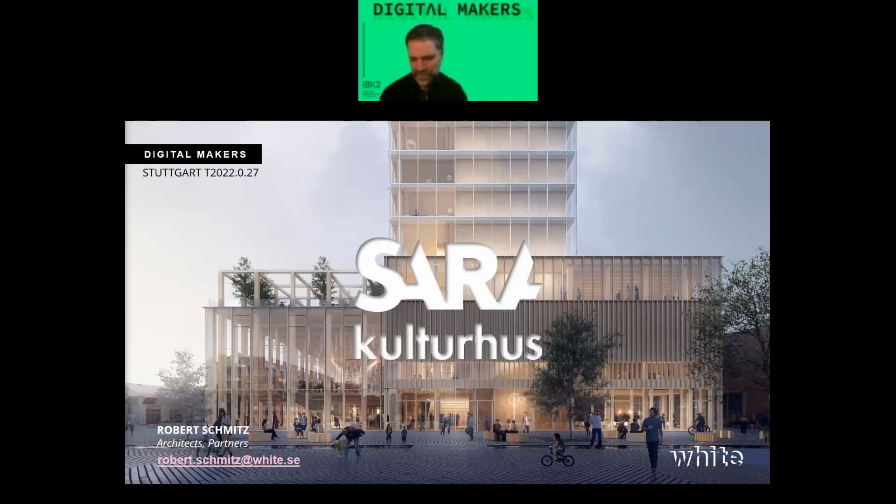We got in contact when we had this exhibition, Heart of Wood, in Berlin, about this project at the AEDES Architecture Forum as a single project exhibition. The exhibition was focusing more on how the construction is very strongly linked to the architecture, following that process.

Since then the exhibition has hit the road, and we just opened it up in Prague last week. It's going to be exhibited there for a couple of months, until the end of March or so. There is a lot of interest in how to build in timber, and as you said, it has become a beacon for sustainable building construction and for timber, becoming a backdrop when discussing timber and the possibilities you can do with it.

Germany, as many other countries, almost any other country, has problems with legislation for building in timber. We're fortunate in Sweden that our regulations are not based on material, but based on function. So as long as we can prove that we can build this and people can get out safely from the building in case of fire, we're allowed to do that. That's the main reason why this is possible.

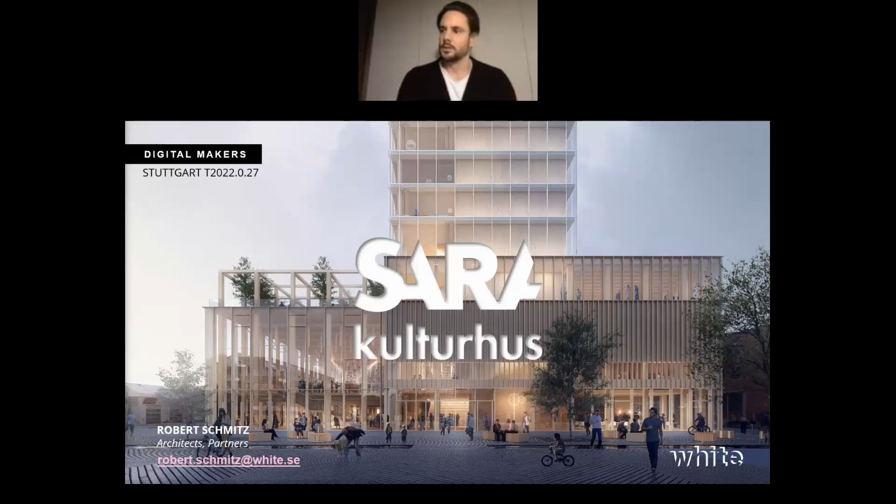This journey for them started long before we came into the picture, with stakeholder involvement and dialogue together with the municipality and the people in Skellefteå, asking them what they wanted and needed in the city to make it more attractive. After they decided they wanted this culture center right in the center of the city, they launched an open competition, and that's where we got involved in 2016.

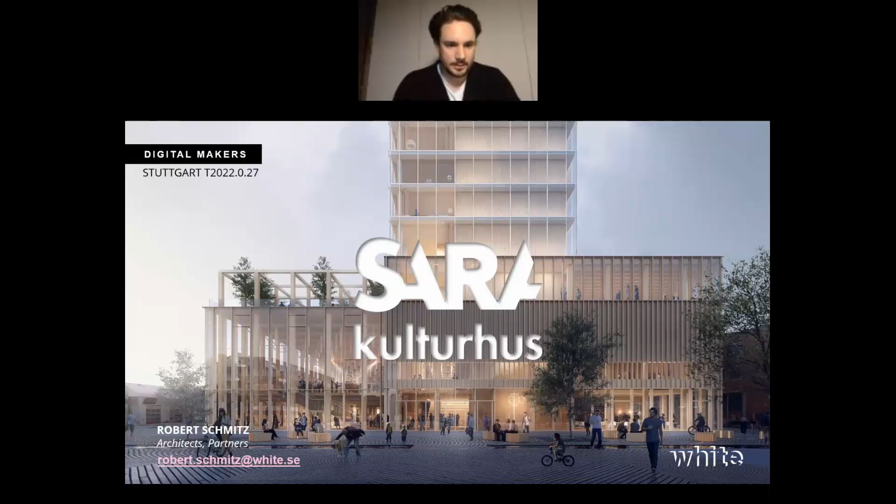But let's see if I can... oh, here I can do it like this. There. But first, a little bit about White Architects.

My name is Robert Schmitz, and I've been working for 15 years at White. Before that, I worked in smaller offices, and I also worked at the Royal Palace in Stockholm as an architect for the object, I would say. So that's my background.

Now I'm working with heaps of different projects, but I tend to work mostly with large scale, complex projects. At the moment, I'm working on a high rise of 32 stories, sadly not in timber, but it's going to be one of Stockholm's biggest public transportation nodes, with the tower straight on top of that. That's for another lecture, I guess.

But I've been working with this Sara Culture Center since the competition and all the way into the opening this fall. White is Scandinavia's leading architectural practice and one of the largest in Europe, with projects across Europe, America, and Africa.

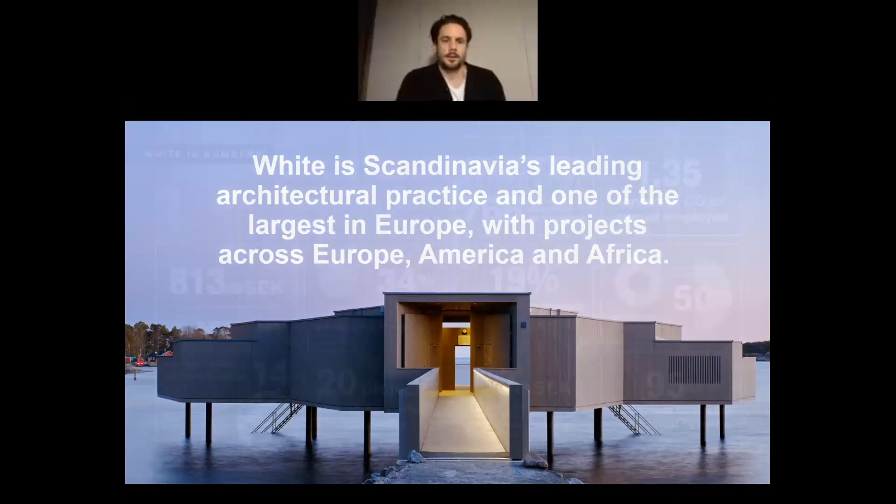We also have 14 different studios. Most of them are located in Sweden, of course, but we also have studios in Oslo and London, and from last year in Stuttgart, where we have an offspring. The offspring is from the Stockholm office, so we are also supporting and quite involved in the Stuttgart office. There we have about 7 people working at the Stuttgart office, but in Stockholm we are about 230 people working, so we have quite some muscle if we need to help the Stuttgart office, I would say.

White has always strived to work with architecture and sustainability in integrated design. We think a holistic approach is the best way of dealing with these matters. We also like to keep numbers on our environmental impact, so you can see that we're trying to keep that - not just saying stuff, but also doing the same as we say, if you understand what I mean.

We are an employee-owned company, so every employee can buy stocks and shares in the company, and the revenue goes back to the people that actually work in the office. We also have a partner system - I'm a partner, but there are lots of partners working together as a collective, basically.

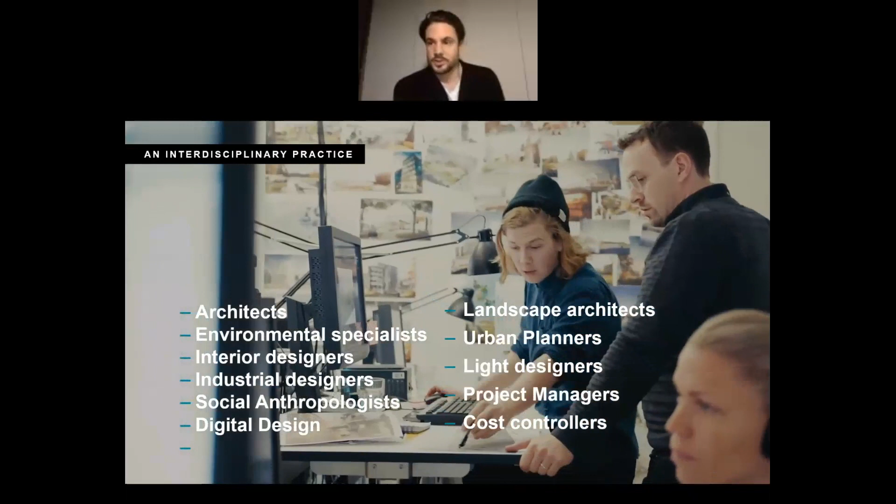We work interdisciplinary throughout the entire design process with architects, environmental specialists, interior designers, industrial designers. We have social anthropologists, and we work a lot with digital design throughout all of our projects. We also have landscape architects, urban planners, and project managers. We work a lot with cost control, really in the early stage of each project, so we can actually make them feasible for our clients.

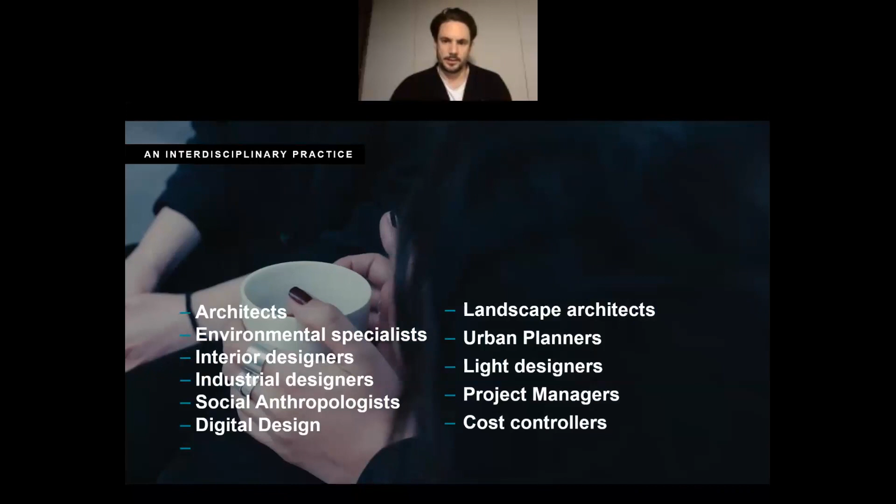Our vision is that by 2030, all our architecture will be climate neutral through our design. This is quite a bold vision to say, but since we said it, we have really started this journey to transform into a more carbon dioxide neutral construction.

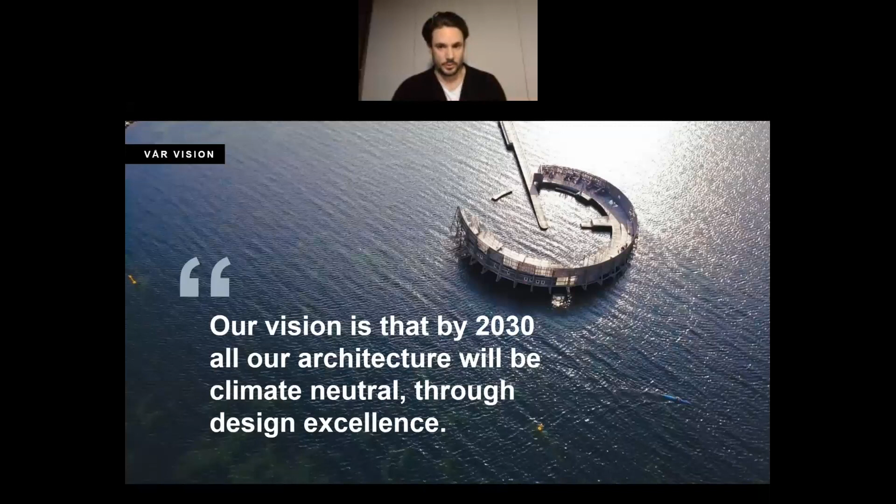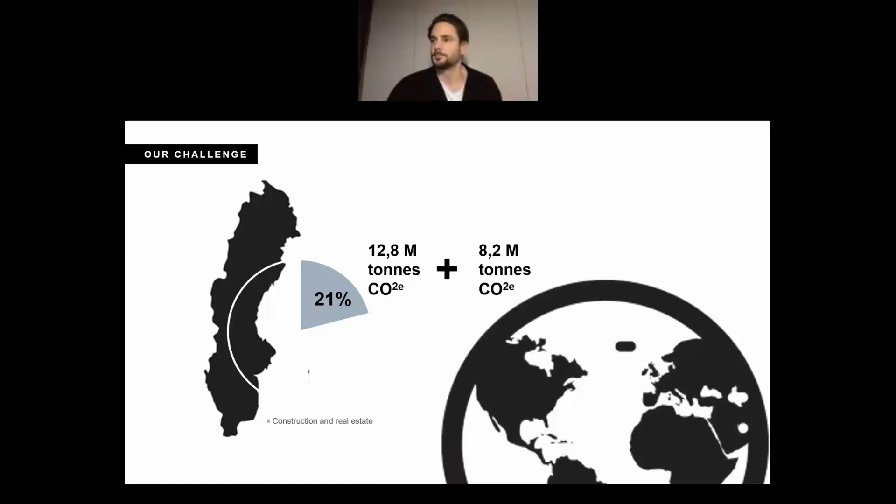That is our challenge, and I always start with this because construction and real estate takes about 21% of carbon emissions, and in Sweden we're producing about 10 times more than the planet can hold. So it's our responsibility as architects to investigate and suggest materials that have as low impact on the environment as possible. Timber is one of those - the only renewable material that we have today to work with in construction.

Being owned by ourselves means that we can do whatever we want with a profit if we have one. We have a White research lab that we can channel our profit back into research, which benefits our project. This is mostly project-based research. We have lots of different levels of researchers, but it should be hands-on, so everyone can participate. It doesn't have to be topic-based, it can also be work within a project. We have a network distributing this knowledge back to the rest of the company, so they can make it into their practice as well.

One of these research labs is timber, because this will help us in the transition into carbon neutral construction. With the Sara Culture Center, we really wanted to investigate the possibility to build a complex, large-scale building like this in timber. So we used the research lab to get funding to actually participate in this competition. That's one thing we do with this money, for example. It's basically very hands-on.

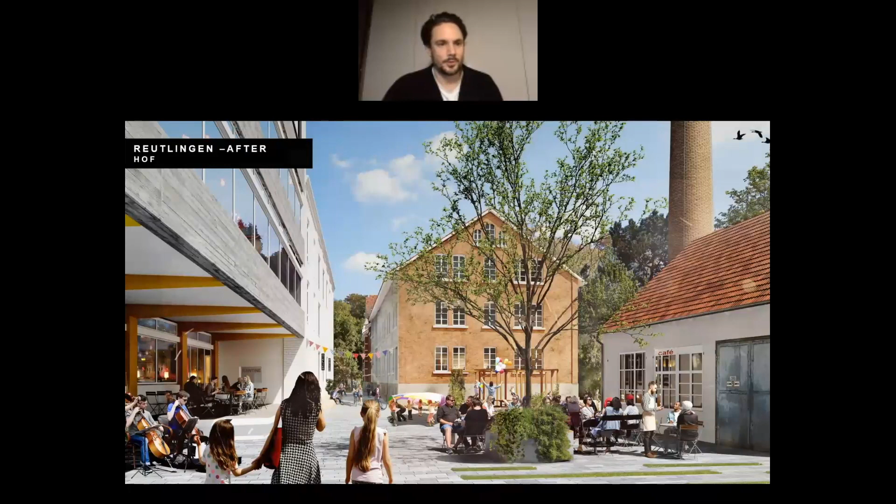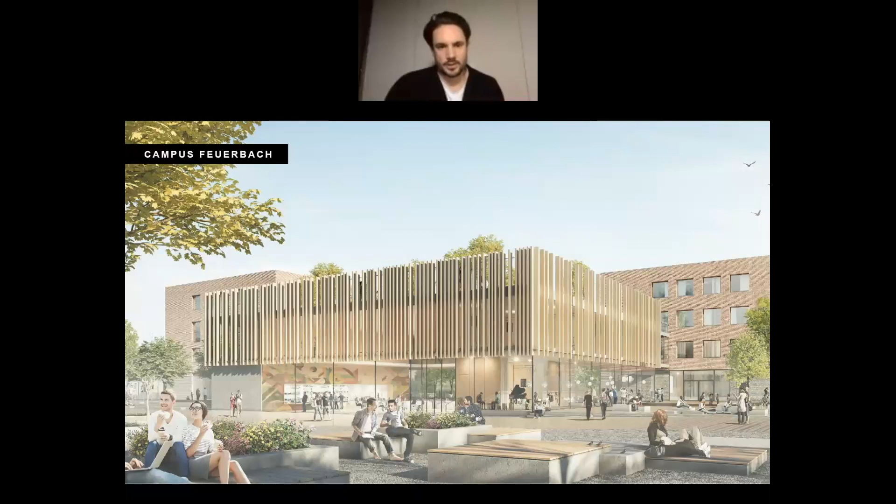Here is another one, and these are all competition wins. Mostly we have added things in timber, and we've used the Sara Culture Center as a reference in all these projects. So this is not only a beacon for sustainable construction, but also a beacon for White and for timber solutions. We learn a lot from this project, and we try to take advantage and use our skills to develop new methodology, not just in culture centers, but also in residential projects, for example for elderly.

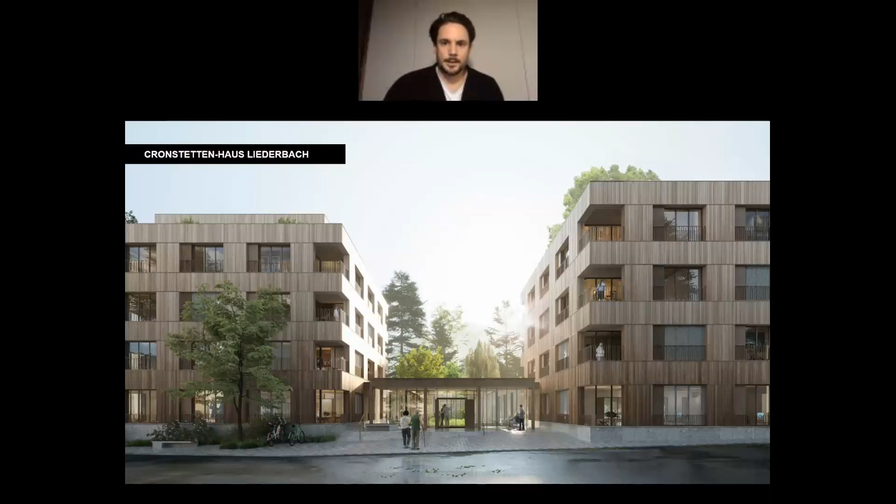At the Stockholm office, I'm head of competitions, so I decide which competitions we should go on, and I try to help with teams and everything. But I also compete a lot myself. Right now we are investigating timber in almost all of our competitions.

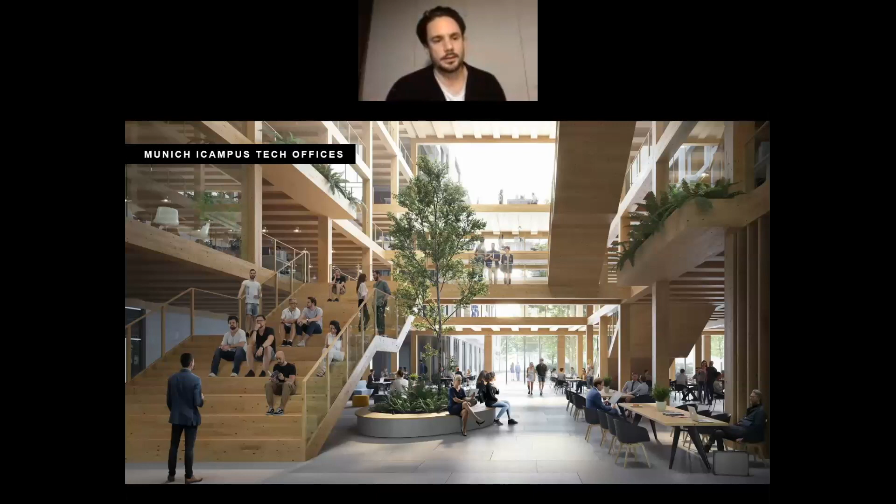This is a competition in Germany, in Munich, the iCampus, where we're working with beams that could be in CLT but with long spans, for example, to get a lot of flexibility in the building. Sorry, we didn't win this one, but we won another competition in Riga, Latvia.

It's called the Kimmel Quarter, and this is also an old beer brewery factory that is going to be converted into a culture center of some sort, combined with a new establishment of offices. It's about 50,000 square meters of timber offices in 6 stories. Here we are actually changing or testing the fire regulations in the country to see if we can build this tall with so many stories. We have the Sara Culture Center as proof that you can do it, that it's not just theory. So it opens quite a lot of new doors when working with timber and new materials.

Since the modern timber industry is fairly young, it's 25 years old or something, it's still rapidly changing and developing. So I would say that almost any major timber project is a pilot project, where we have to learn new ways of how to handle it and how to utilize the timber for its own purpose.

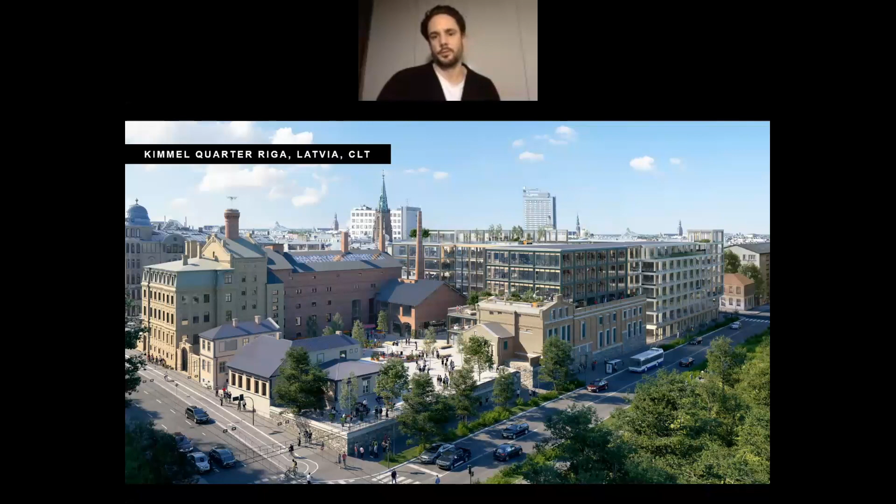Here you can see the interface between the old brewery and the new buildings from behind. We wanted to have this quite intimate scale within the block. This is being used as a culture center, a venue today, and we didn't want that to change. More of the office development could enhance the culture part and add qualities into that.

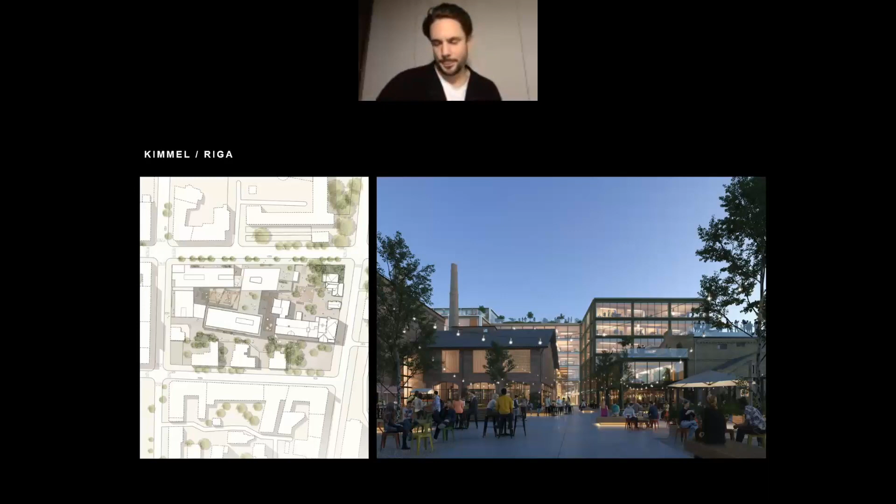Should I continue before I come to the actual topic today, or do you want to have any questions? I think it's fine if you want to continue, and if somebody has questions, we'll put them in the chat. You can ask questions, and you understand my English and everything? Better than okay, most of us.

The program is 17,000 square meters of culture center, and 13,000 square meters of hotel and conference. So it's the public and the private working together to benefit from each other and create a culture hub in the city center, basically.

The culture center consists of 4 existing culture institutions: a public library, the city library, a museum, an art gallery, which are both public, and then the theater, a regional theater, which is quite famous in Sweden. It also travels all the way around the region to smaller cities as well.

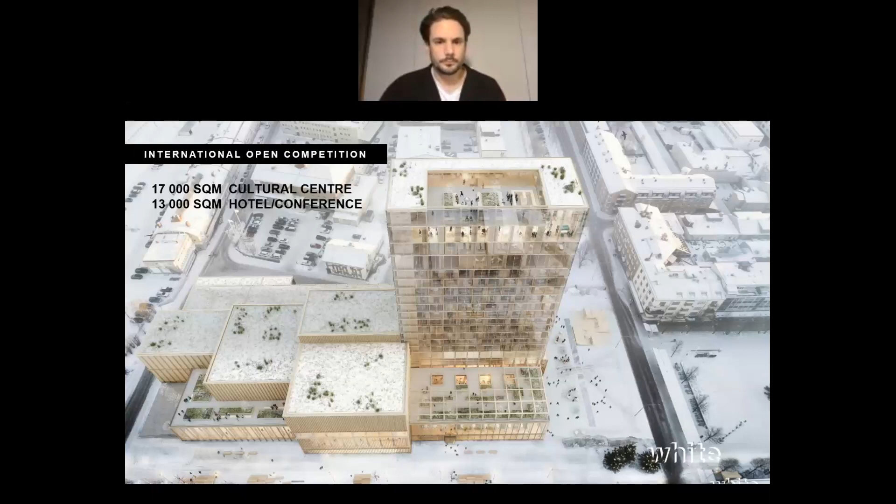But now they have their own home stage, which they didn't have before. And our concept when working with the project was that we wanted the building to take part in the city and not create any backsides.

We wanted the interface to be easy, so you could look into the different operations that were inside. So we placed all the big stages and scenes in the center, side by side, allowing all the different operations to work with the city.

They allowed for entrances in all directions, creating street life on the streets. We didn't want to have any backsides in this building. The other stages are great venues, but when you're there, you're only looking at the stage. So this should be a building that operates through the entire day, from morning until evening.

We're working with adjusting the scale and heights to its context and its surrounding street levels, with these boxes that both expose the contents and also work up to the high-rise where the hotel is. This creates different and new public spaces, also vertically.

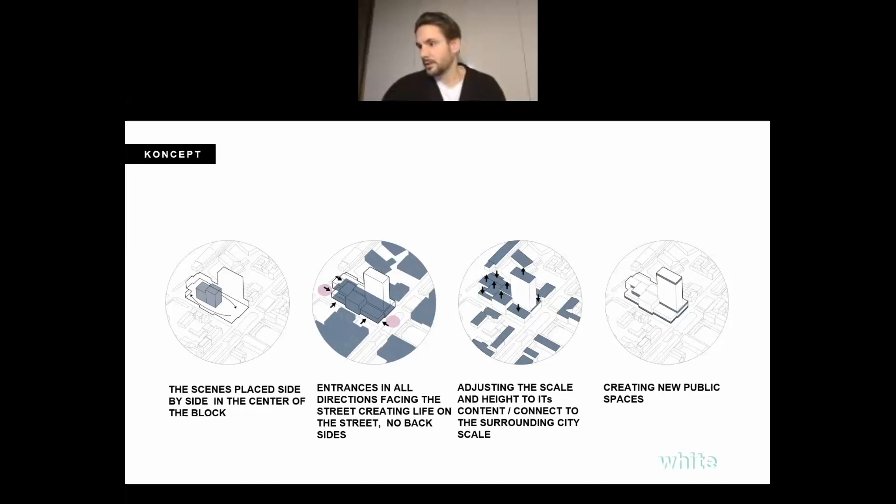So you have a new perspective overlooking Skellefteå, and it also gives back spaces to the people who live in Skellefteå. It was very important that everyone could get up there, even people who don't pay for a show or have to have a dinner.

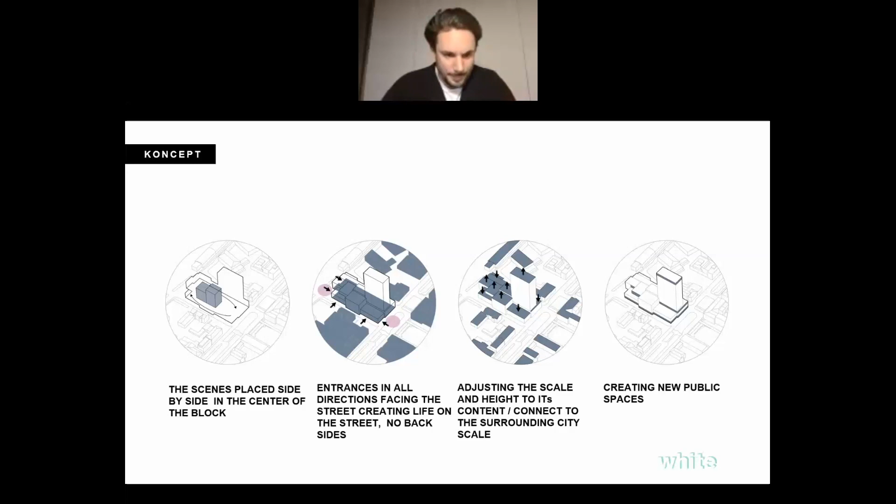So then we have created a new landmark in Skellefteå, a sustainable landmark. And with this new scale, the building is twice as tall as the second tallest structure in Skellefteå. So you could say that's quite a bold move.

But since we have exposed the timber and used it as an expression, people can really relate to it, as I mentioned before. There hasn't been any complaints at all, basically, since the timber gives this warmth and character to the building. This is something the people in Skellefteå are proud of, I would say. And it becomes, as one critic said, a friendly giant in Skellefteå.

And the landmark also, because of the glazing, which also exposed the timber within, really participates to its surrounding and gives life to the streets of Skellefteå, especially during the winter season or at night.

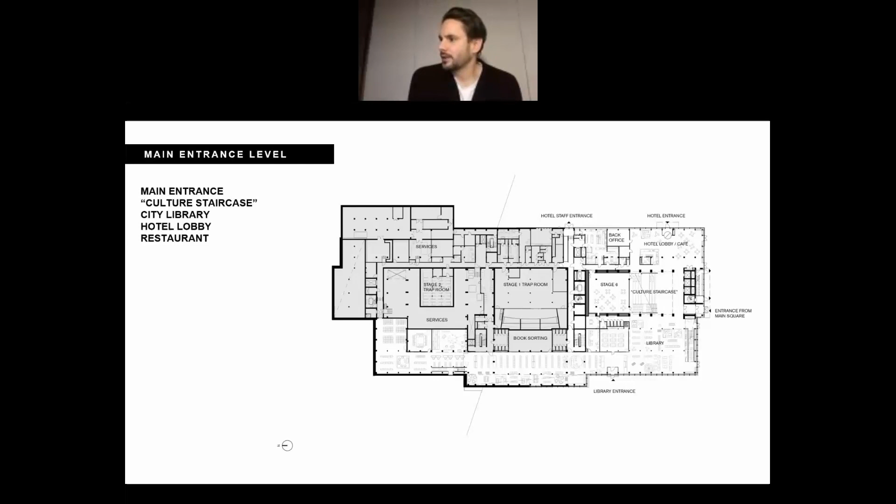Here is a plan of the building, and this is the ground floor, with the entrance facing the main square. Inside, underneath the high rise, you come into the main entrance, where we placed the culture staircase, as we call it. It's an oversized staircase connecting to all the different operations within the building, and this becomes a melting pot or meeting place for all the people.

And you can get in here without being able to pay, or without having to pay for anything. Our ambition was that this was supposed to be the new meeting place in Skellefteå.

And here we put the elevators for the hotel, so that the hotel guests should interact with normal people in Skellefteå. We also had the library as the anchor on the street level, because people will use this during the entire day, and this is also the one that is open the longest hours.

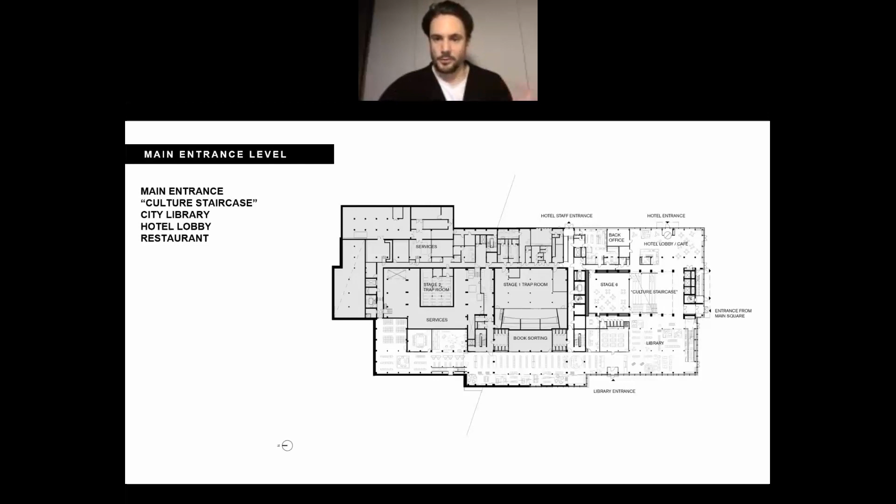So basically it's shared between the hotel lobby and the library, so that people can really mix and interact, and hopefully this becomes a platform for discussions and culture in the city. And here you can see the culture staircase, as we call it.

You can see these massive columns supporting the high rise in solid timber. They are about 600 by 800 millimeters thick. That's something that we really wanted to express in the building, using the construction timber as architecture. Also, the trusses holding the ceiling are made from timber.

But here we wanted to give the space character. We used steel for the diagonals, since steel is better at taking tension, and timber has a better way of taking compression. Otherwise, it would be so thick that there would only be beams. So this is a way to play with material optimization, while also having it as ornamentation, basically.

So from here it leads to all the different operations in the building. This is when you come up from the staircase to the main foyer that basically surrounds all the stages at the upper level.

It's a split level, basically, so we have two entrances: one the main entrance, and then the theater entrance on the other side facing the train station. This is a space that is very large because it's going to hold banquets for 1,200 people.

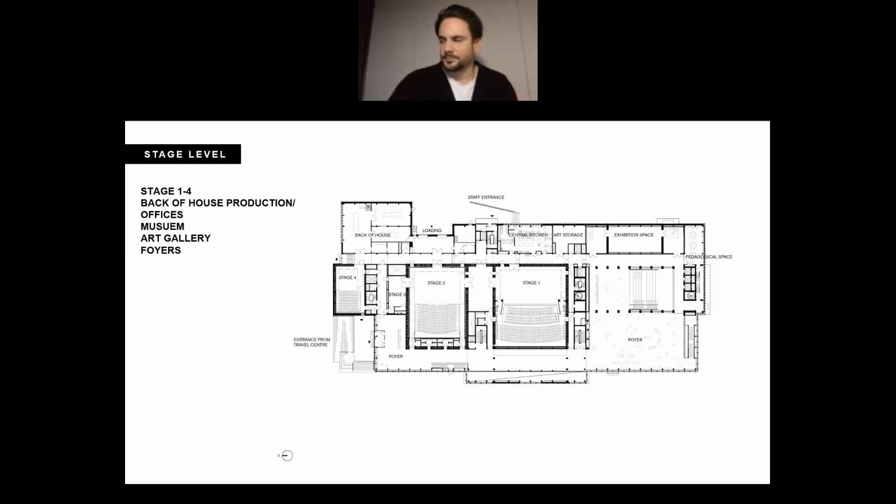Behind that we have all the back-of-house functions, with the joinery and forgeries and sewing for masks and clothing, for example, and the changing rooms for the actors. So everything is integrated into each other within the building.

So we've been working on connecting these two floors, working with the library and the foyer as the lungs of the building, so that they can be used in so many different ways, in different configurations, and hopefully the different operations in the building can work together in these spaces as well.

We've been working a lot with digital design, working with BIM in this project from the very start of the competition. This has been a very good instrument to show that the construction is very important, because it will be the architecture. It explains and visualizes to all the stakeholders in the project, because we've worked with almost 100 persons at the most, so that they also understand the effects of certain choices.

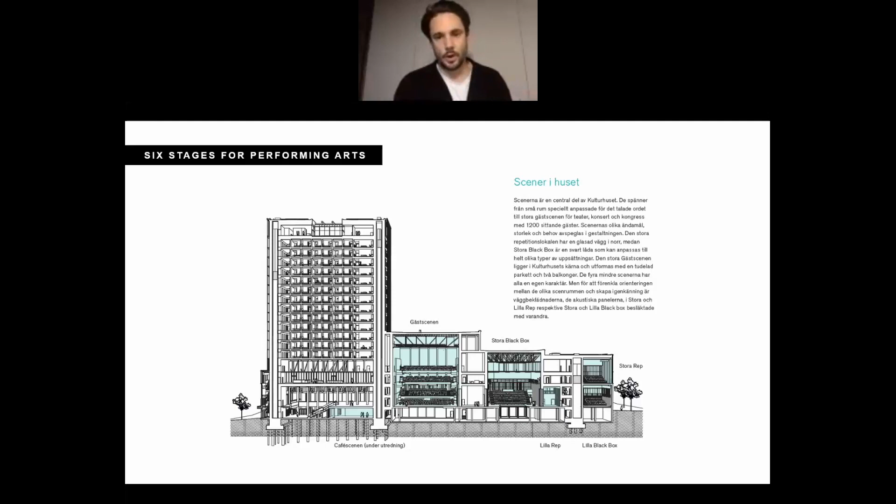The section shows the stages running alongside the entire building, and then you have the high rise with the hotel that ends up with the staircase and the main lobby. It's 6 stages for performing arts totally. The main stage holds up to 1,200 seats, but with retractable seating we can go up to 1,500. This is the building from the stage looking into the saloon.

It's been open since September, I think, and it's been having shows until quite recently when we had restrictions again because of COVID. They've been sold out almost every night, so there has been quite a need for performances and for community in Skellefteå as well.

This theater is also made with the walls and the roof, the trusses holding the roof, everything in CLT and glulam pillars, and the balconies are made from CLT slabs.

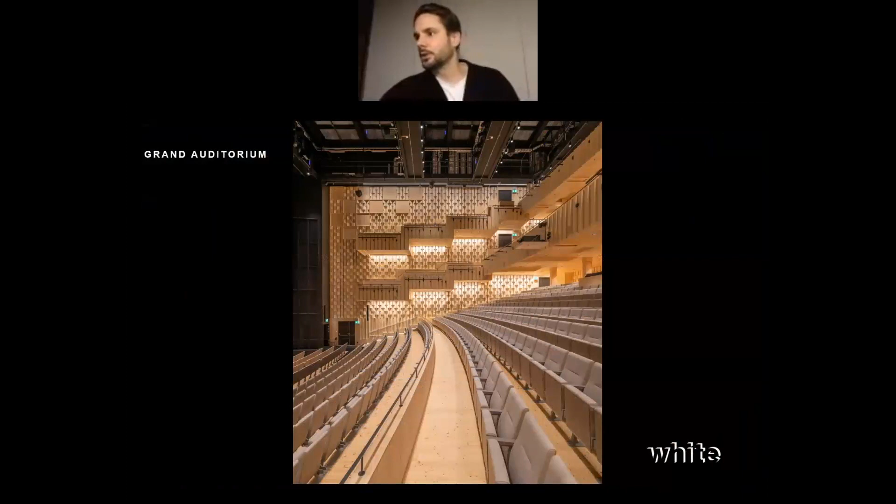We worked a lot with the acoustic panels, adjusting them so they have the right performance, and in the end they were easiest to make in solid timber as well. So from having boards with insulation or plastic insulation behind to fulfill some requirements, it became easier just to have a chunk of timber, achieving the same solution. It's about rethinking construction and rethinking the way to use stuff, how to build stuff.

Throughout the entire design process, the crew worked on simplifying this. When we work with timber, we don't need any other material. In a way it's taking back an old technology, but in a new form.

Let's go to the hotel. I'm giving you a guided tour across the building, and you just let me know if I'm getting too slow.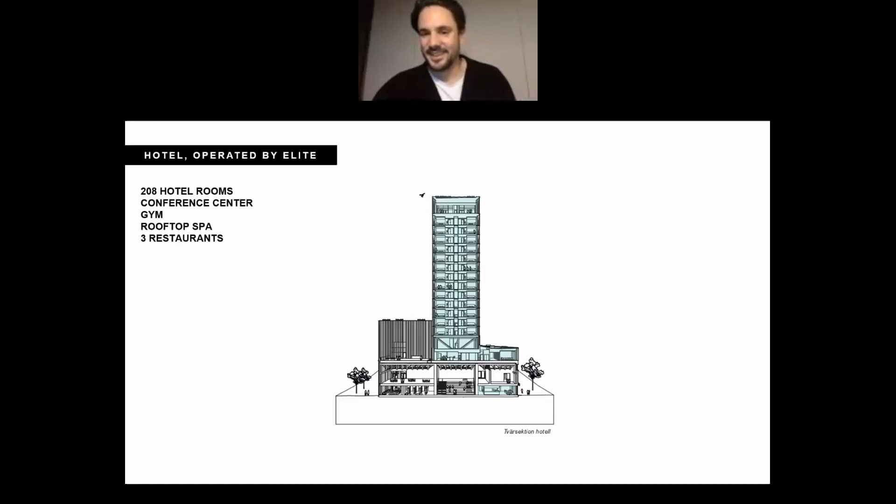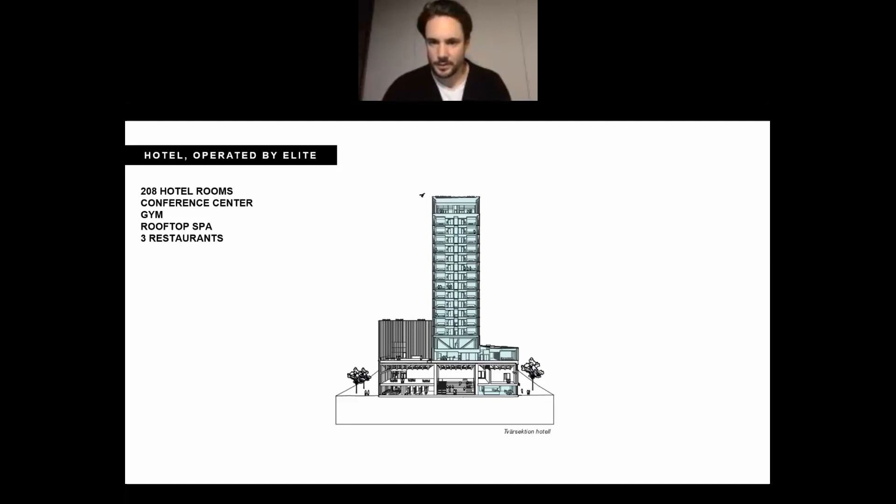The high rise, not quite a high rise but 20 stories, consists of 208 hotel rooms. It has a conference center, a gym, a rooftop spa with an outdoor infinity pool—it's a very small one, but it's still there. And it has 3 themed restaurants: one on the ground level, one on level 4 with a terrace, and one on top overlooking the Skellefteå skyline.

These hotel rooms are made as 3D volumes, pre-manufactured in a factory just outside Skellefteå, 40 kilometers away, then delivered on site and assembled and stacked on top of each other for 13 stories between 2 cores of CLT, stabilizing these. The entire building helps stabilize and take down shear forces from the high rise.

So the construction is very integrated into the design. All our design decisions were made so that we could allow the high rise to stand, basically. That was also good for us in a way, because then we couldn't change it to another material, since we'd have to rethink the entire construction. This was something we came up with in the competition as a concept for the building.

This way we also don't need any diagonals in the facade, which is very unconventional when working with timber, for example, for stabilization. That was something we really stressed—we couldn't stress enough that our goal was not to have any diagonals in timber or in steel in the facade.

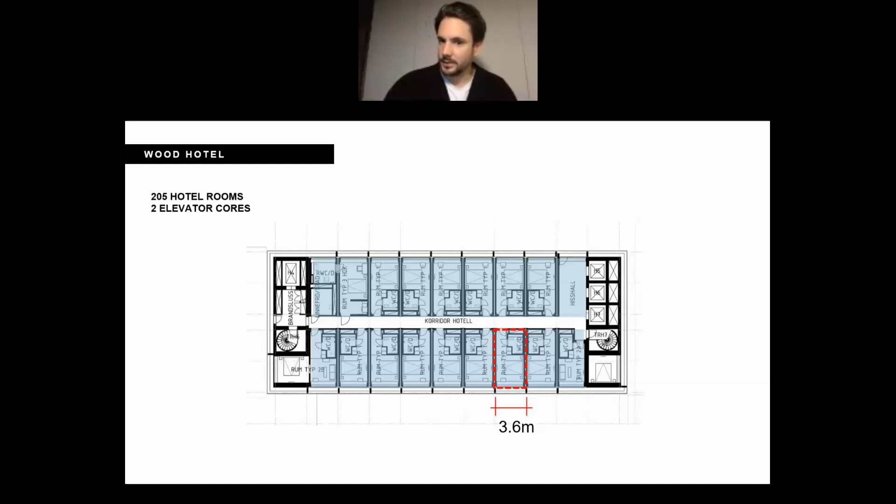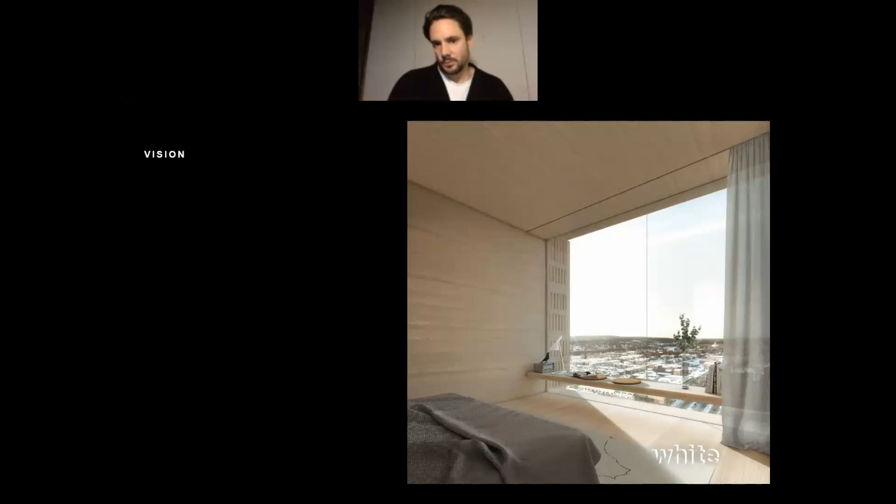Because this is self-bearing, it allows for a single sheet of glass as the fourth facade facing Skellefteå.

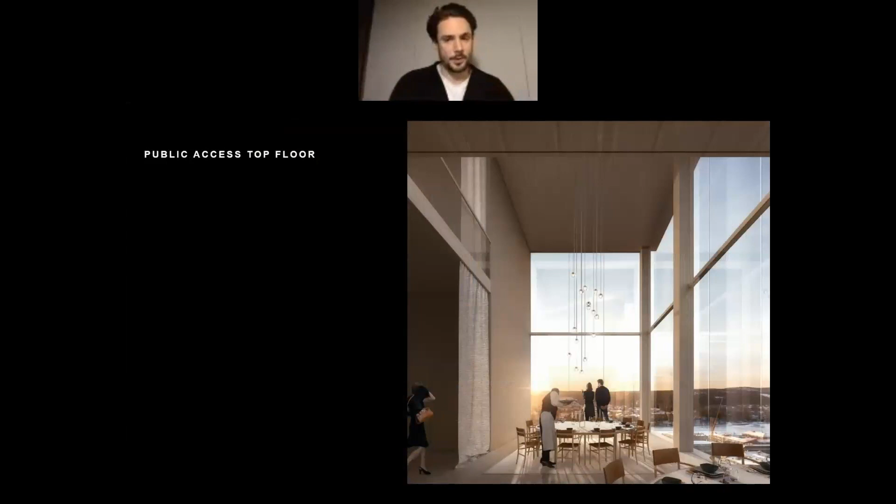On top we have a restaurant and the spa. The spa was the latest addition to the program, which also made the building grow one story, from 19 to 20 stories. But it was really a challenge to put a spa with lots of water into a timber building—it's not recommended for everyone.

This building is really tailored to fit its purpose, and it has so many different typologies of solutions. It really becomes a library of standardized timber solutions and details that can be used not only in this project but in many other projects as well, more residential or offices. This has really been a test bed for us in our search for how to manage, in a feasible way, working with detailing in a timber building.

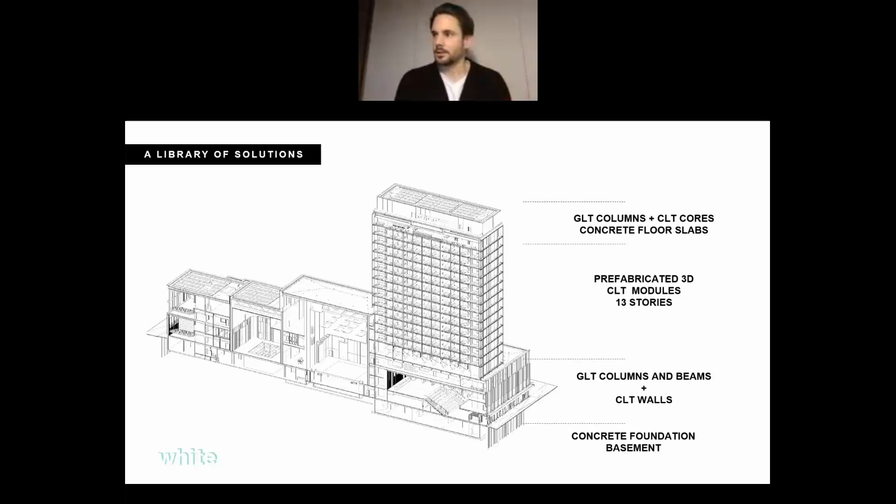You can see that we have some concrete in this building as well, especially in the foundation and the basement. But from up there, all the vertical construction is timber, with glulam beams, and we have CLT walls and slabs. And then we have these prefabricated 3D CLT modules, so that they are stacked 13 stories.

I think that's the world record for today, by twice. The existing one today is like 6 stories. So this has been an innovative way of working with the material basically.

On the 2 top levels and on the roof, we needed to add weight, to prevent the accelerations of the movement in the building, and prevent people from getting seasick basically. So it hasn't anything to do with the construction, it's more to get weight into the building so that you slow that down. And that's because of some regulations and performance, or how people feel when they're up there.

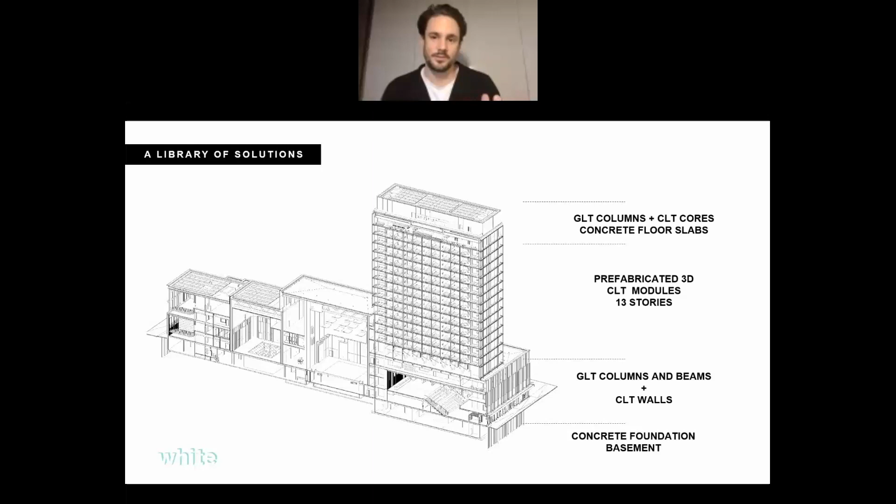In the next project we will probably use a damper instead of the concrete, for example. So there are solutions for that as well, but we didn't make it that far in this project, but still.

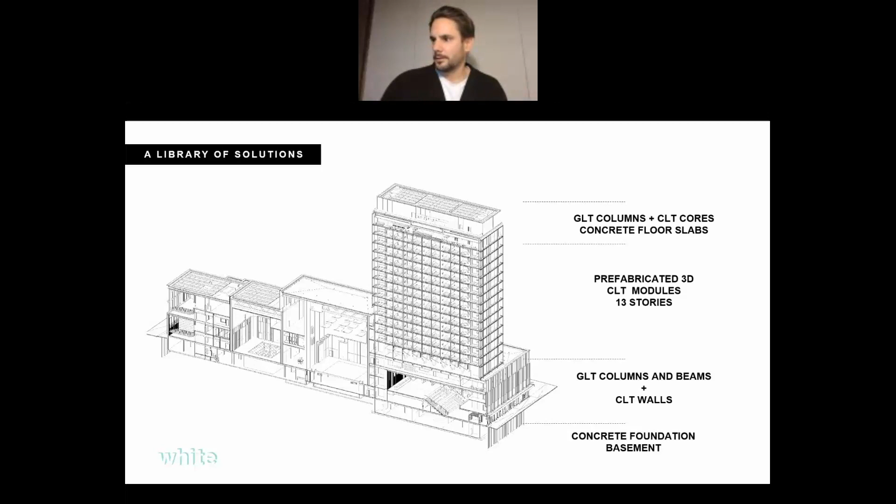So we're starting with a timber structure that we wanted to expose as much as possible. We created basically 2 building envelope systems in the building. For the culture center part, which is the base or the low-rise in the building, we have timber walls cladded with timber boards basically, and glulam louvers.

It's a triple glazed system with a click-on system, so that the louvers of the glulam can run through exteriorly, and you don't see the mullions. As you can see here, for example, on the right side, that's the wall. You have a CLT board, then a number of insulation, and then you come to the timber cladding outside of that.

On the high rise, we have a double skin facade with a specialized air shaft profile. It allows, in the summer for example, for a diagonal chimney effect in these pockets, so that we can warm air out, but in the winter we can use it as a warm buffer. So it helps with the energy system in the building, and this also protects the solar shading system that we have, the curtains.

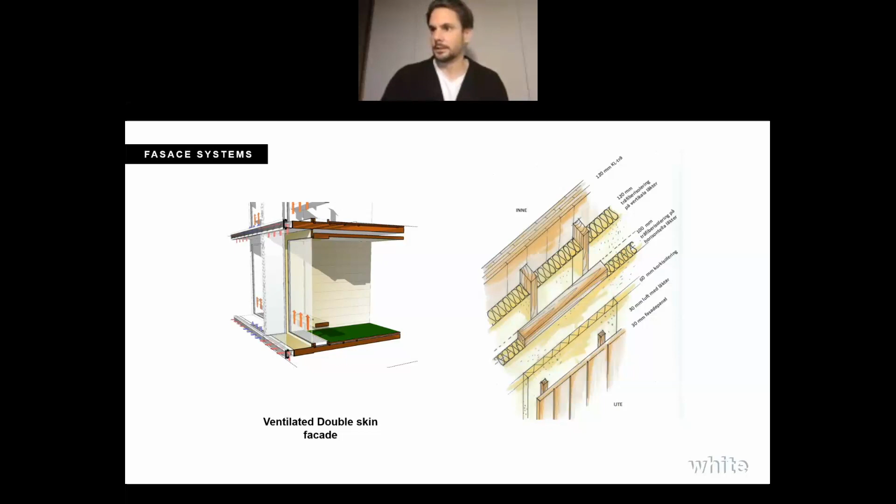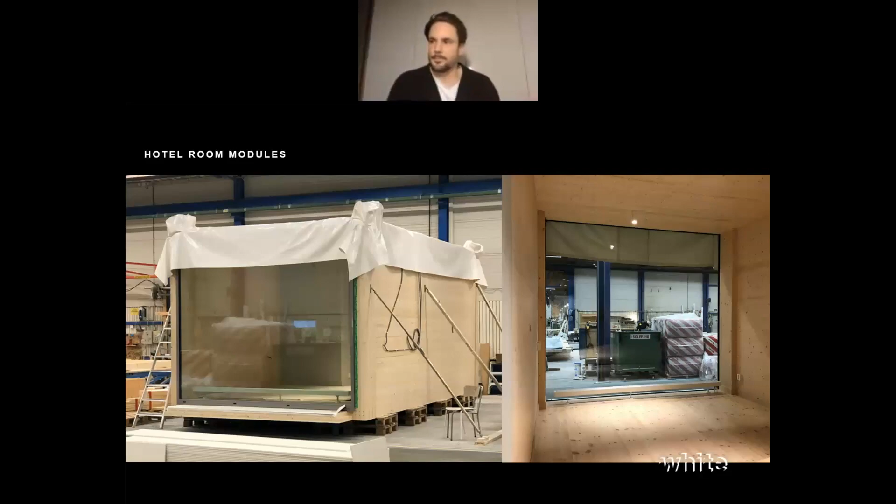And these are the hotel modules. This is the first one, I think. It was made in the factory outside of Skellefteå. So the timber manufacturer delivered the slabs here, it was assembled by another company that then gave it to the contractor, who were basically moving them up and stacking them between those cores.

So it was really a collaboration between the architects who were designing them and the construction guys. There were 4 different companies working with these, and we all wanted the same thing under one goal, so we had to work together, otherwise this wouldn't have been possible.

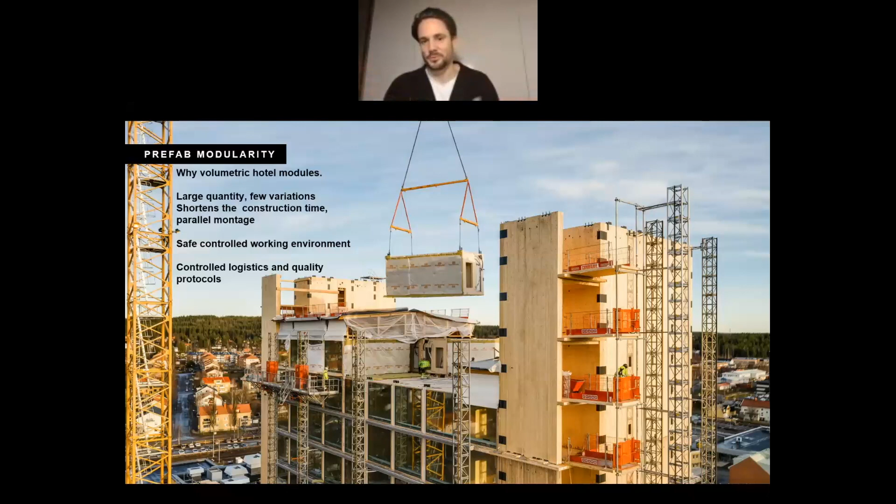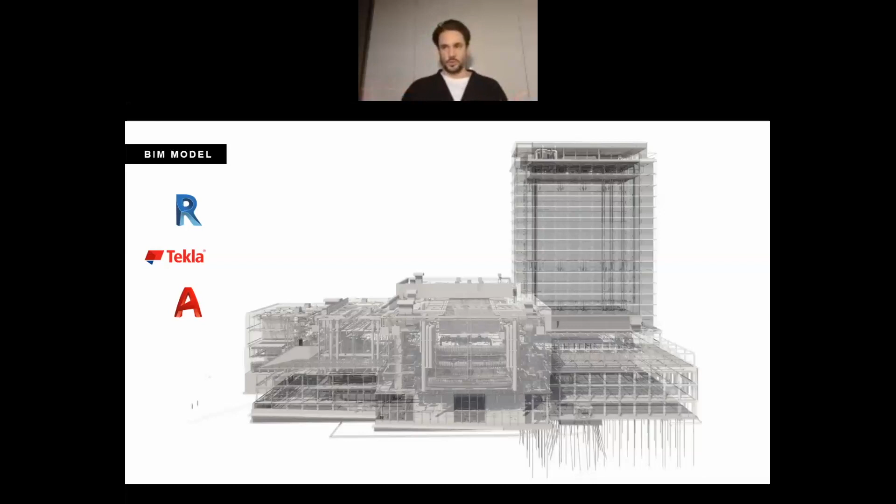When we started this project, we were general consults, right? So we made all the engineer firms be skilled in working in Revit, and we've been working in Revit ever since. But as the technical design moved further and we became more detailed, we could also use Tekla, for example, and import that into the Revit file.

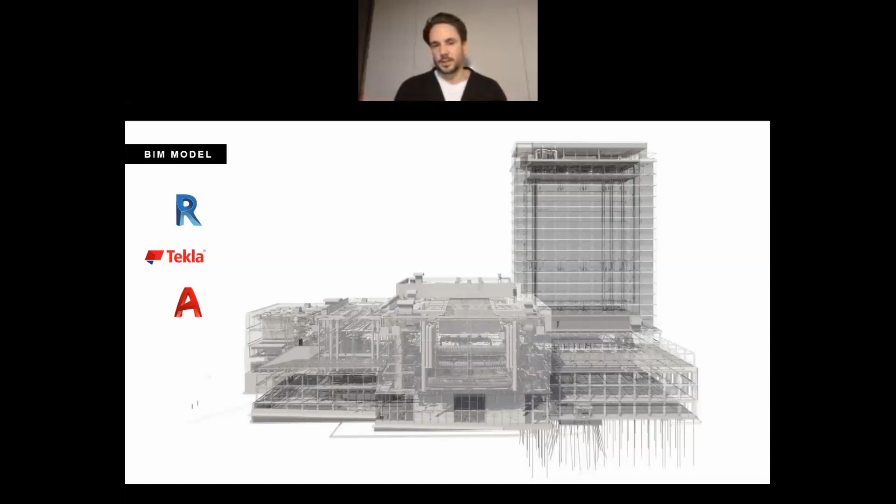We have about, in this model, it's not a digital twin, but it's close to it. It has about 300,000 components, and we've been working every week on coordination to see that it doesn't collide, checking collisions, so that everything has been in order, because the entire building is 99% prefab, made of off-site construction. Yeah, so it's 298,200 objects in the Revit model.

Building in timber, and doing the pre-manufactured hotel modules, one of the benefits is that we could save a lot of time during construction. The contractor says that compared to building in concrete, for example, we saved about a year of construction time. That's almost half the construction time with timber. In total, it was 124 weeks.

So in terms of getting the investment returned, timber is a really good material to work with.

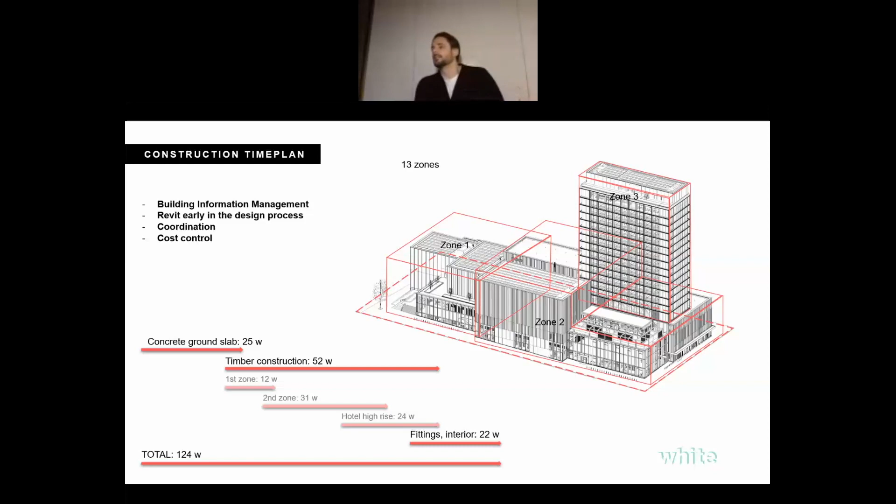We had to divide this building into 13 different zones, so that we didn't build with weather protection. We built it in sections instead. We'd finish one section's roof, then build the next section, so we could plan ahead with all the other construction parts, and we were always ready when the next section was going to be ready.

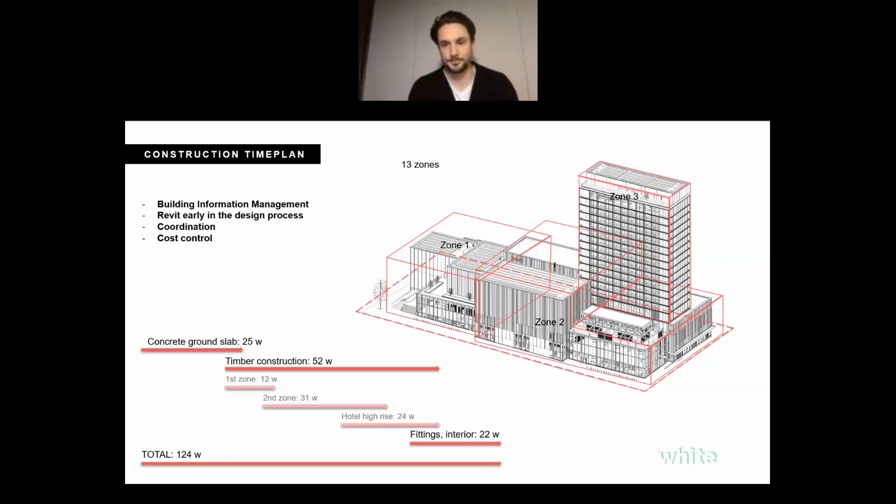The lightness of the timber made the construction really fast as well. We could have slabs where the tallest one came in a single piece, 25 or 27 meters tall and 3 meters wide. It was really wind sensitive, this construction site, I would say. But this allowed for fewer lifts and fewer movements of the crane, and fewer trucks coming with the material, for example.

It went really smoothly, and this is the first project I've worked on with no complaints from neighbors during construction, because it's silent. You don't have much noise, only the drilling, hearing the plates getting put together basically.

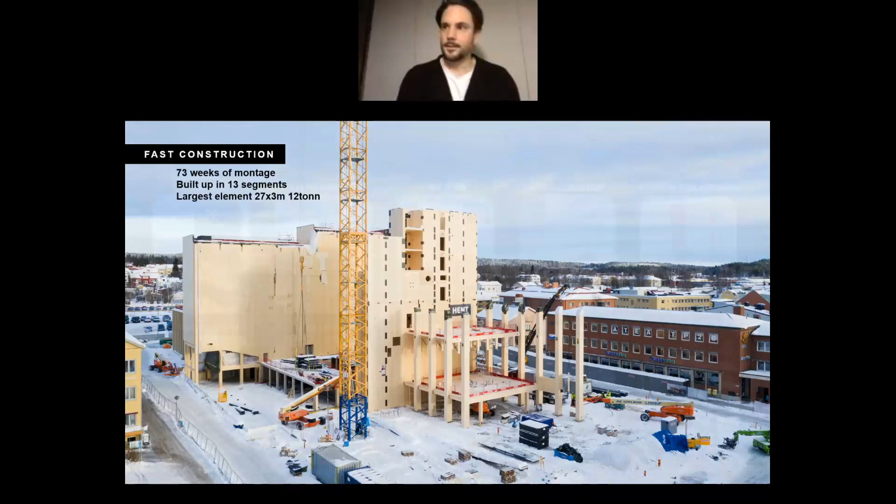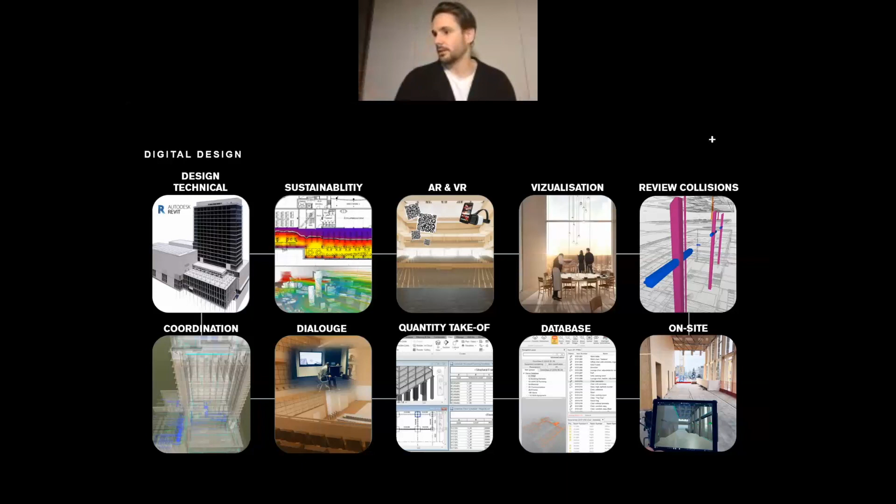We used it as a dialogue tool, and we took quantity takeoffs also for databases. We also used it on-site, so you could compare the digital model to reality, and really see if it fits or not, for insurance purposes.

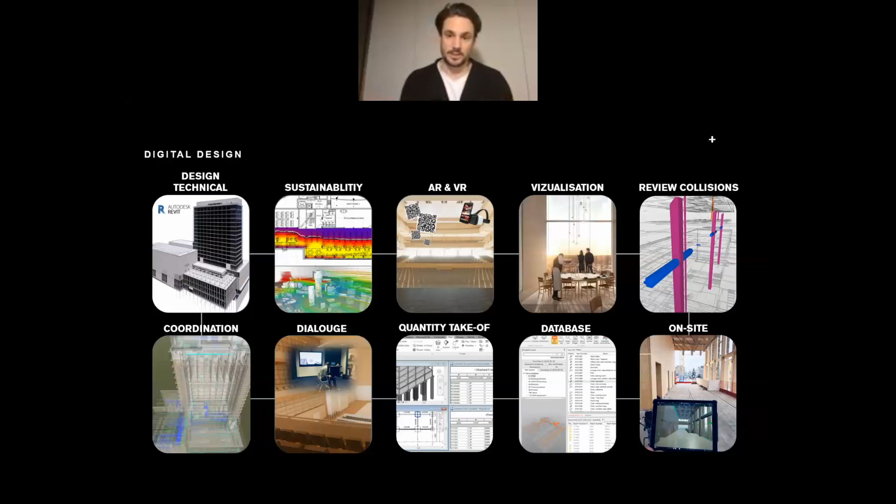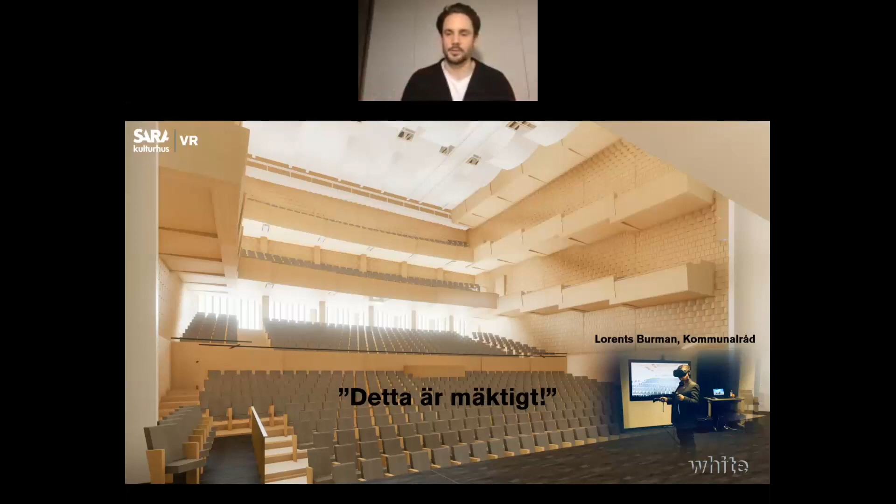This is a view from the mayor of Skellefteå, the municipality, shown with VR. He went running around the building and experienced how the main stage was going to look in real life before it was done. It was a really good selling argument to the people investing in this project, to get everyone on board with the team.

The building is rated BR0 in the Swedish system, basically meaning the high rise has to have 60 minutes so everyone can get out safely from the building. The lower parts have 60 or 30 minutes depending, because there are so many people that can be in this building. So it's a different system that we have to think of.

It's also not just about the construction - we've added extra mass so the charring effect could work as an insurance for the timber. We also have a redundant sprinkler system with our own water basin, which has a motor, an engine run by electricity and batteries from the Northvolt battery company established in Skellefteå, instead of diesel engines, for example.

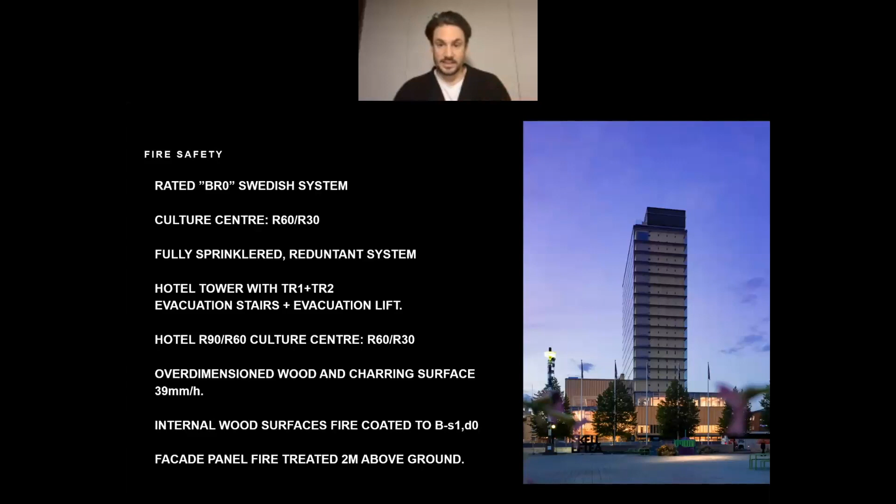So the building has been, I would say, using a lot of different sustainable approaches, not just timber as the sustainable material, but we worked a lot with the energy distribution system, and the entire building runs on 100% sustainable energy.

Through a smart grid or an AI pilot, it's connected to the entire city grid, so it can actually speak to other buildings and distribute heating, cooling, or energy to the buildings that need it most. That's to prevent peaks, because in peaks you often have to use coal or gas.

So this helps even out the energy systems in the entire city, so it can run on renewable energy all the time. There are others who can speak better than me on this, but I hope you understand what I mean, in English at least.

So we say it's a carbon neutral building, and basically to become carbon neutral you have to add up all the energy and the construction and material, the embodied carbon dioxide.

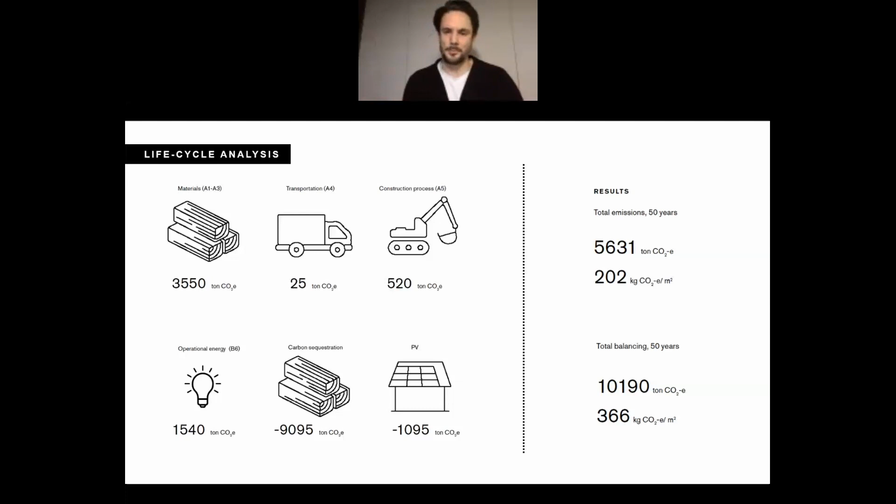Basically, we bind twice as much carbon dioxide as we emit through transportation and the construction process, for example. So this becomes a carbon negative building, but a climate positive building, basically, which is something that...

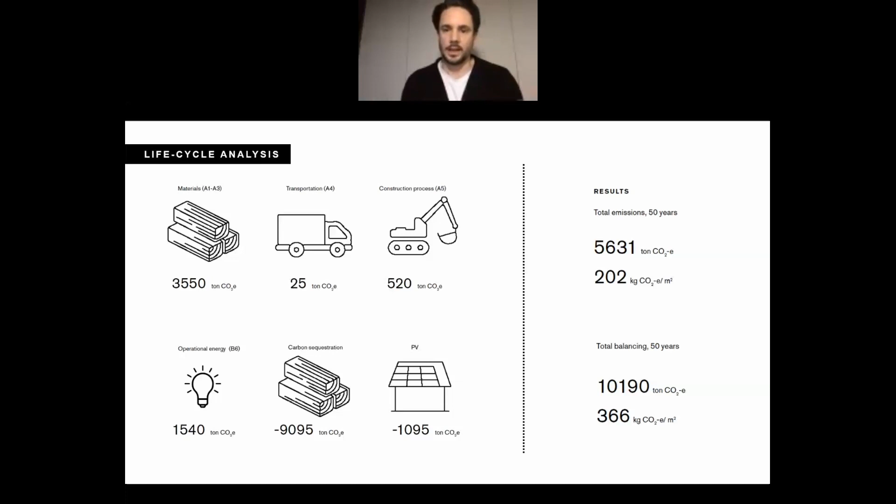...was our intention, but we didn't have the instrument to calculate it. Now we do, through a research program. So this is also really at the forefront of how to measure the climate impact of a building, which is very important.

And then we have all the bragging about different prizes and awards and acknowledgements around the world this building has, but we can move further and say by 2030, all our architecture is carbon neutral through design excellence. Thank you for having me.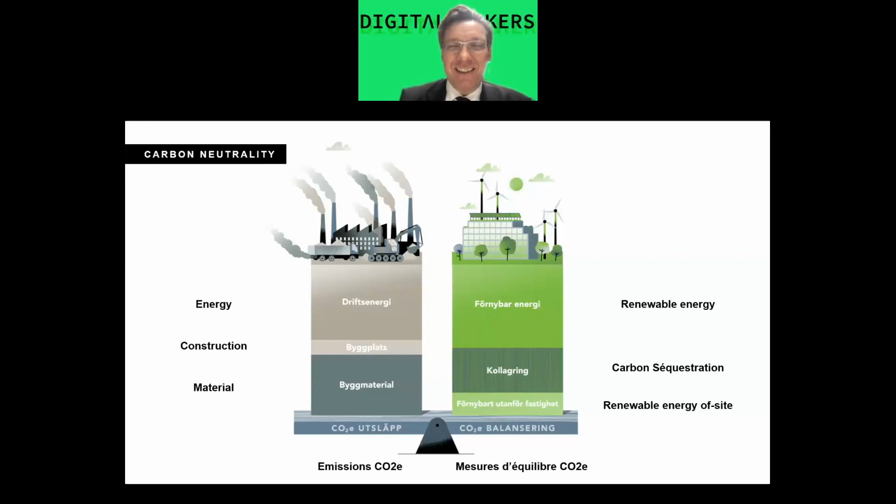Were your interior designers a little disappointed that there was nothing to plan, like no surfaces, because the surfaces are already there? No, it's actually been a good way of saving money for the client, saying that we don't need materials—we could use that as an argument, saying we don't need dry walls, for example.

I know timber is very much the focus right now, and it's exposed, and maybe in the future other materials will be added so it's not all timber all the time. But I'm wondering, in terms of all these exposed surfaces—you touch them, you knock them—with a plaster wall you just repair it with more plaster. Have you planned anything for maintaining these exposed timber surfaces?

Of course, it can. I mean, they will age, yes, this is a natural material that will crack since it's boards glued together, and as they dry, there will be some cracking. They don't come perfect, but you get the tactility in the material for free, basically. What if you can do with plaster, then you do ornamentation and everything, but here you get the surface as it is - we chop it down, so it's not live, but

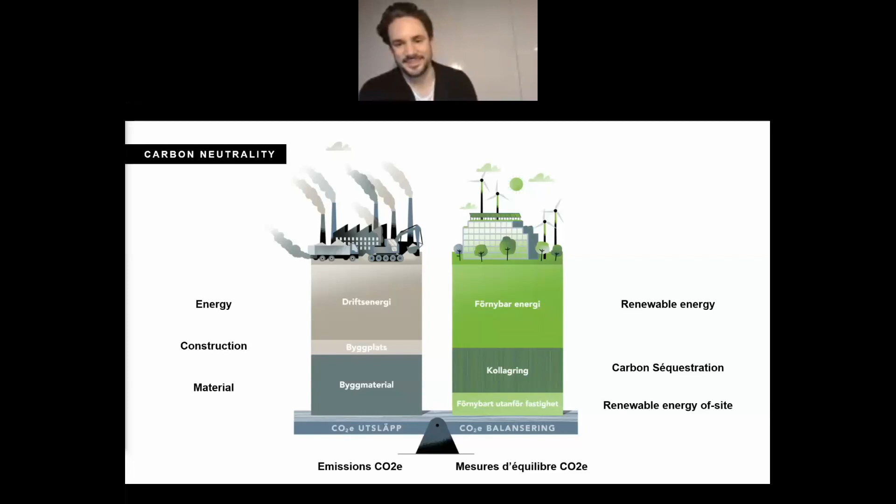So I hope that we can meet in Stuttgart. I'm actually in Berlin myself at the moment, so I'm also not there, which gives us the opportunity to talk to each other. But I think we're looking forward to getting you to Stuttgart. Yeah, sure, whenever the restrictions are gone.